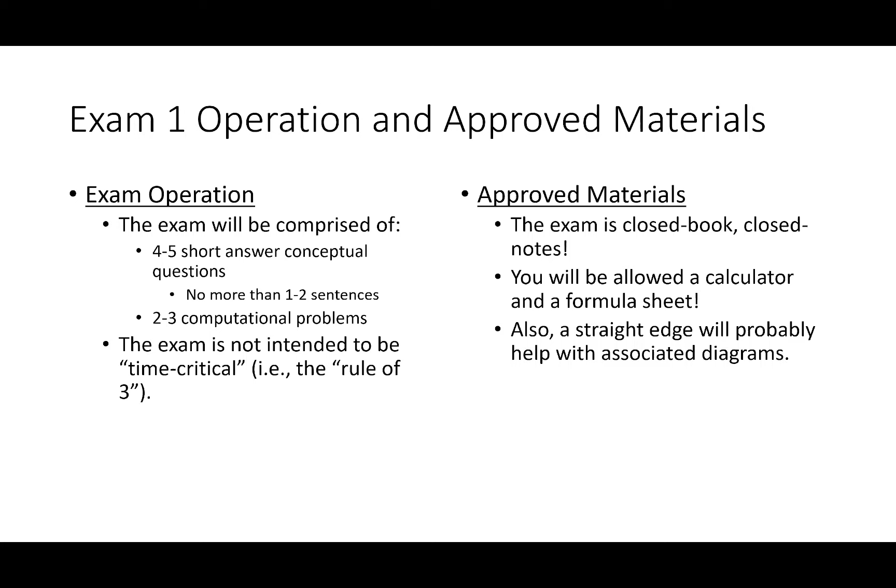It's closed book, closed notes, but I am going to allow you to bring a formula sheet. I'll say that a straight edge might not hurt. It will definitely help during exam 2 and 3. It may not be a bad idea to go ahead and bring a ruler, a scale, something like that, but it's not absolutely necessary. On exam 2 and 3, though, it will help.

In terms of the formula sheet, the one big thing I really want to caution against is putting fully worked out example problems. That is not me trying to be difficult. It's really more for your benefit. I have had a number of instances in the past where there'll be like a truss analysis on the exam, and then suddenly numbers from the formula sheet find their way onto the joint analysis that you're doing on the exam, and now the joint analysis doesn't make any sense. So what I would say is steer away from doing fully worked out example problems. I don't have a problem with snippets or things like that. But I would just steer away from that.

The big thing, though, that's really most important to me is that the formula sheet needs to be prepared by you, okay? What I don't want to see is just, here's the slides, let's copy and paste them, scale them down to an 8.5 by 11 double-sided and hit print. Yeah, you could do that in about 5 minutes, but I'm a believer that making the formula sheet is studying. And so going through the exercise of crafting it yourself and taking your thoughts and organizing them into a formula sheet, I think is valuable. And I'll tell you this, the formula sheets in this class do tend to be pretty thin in content because, I mean, how many formulas have we discussed this entire semester? Like 6? You know what I mean?

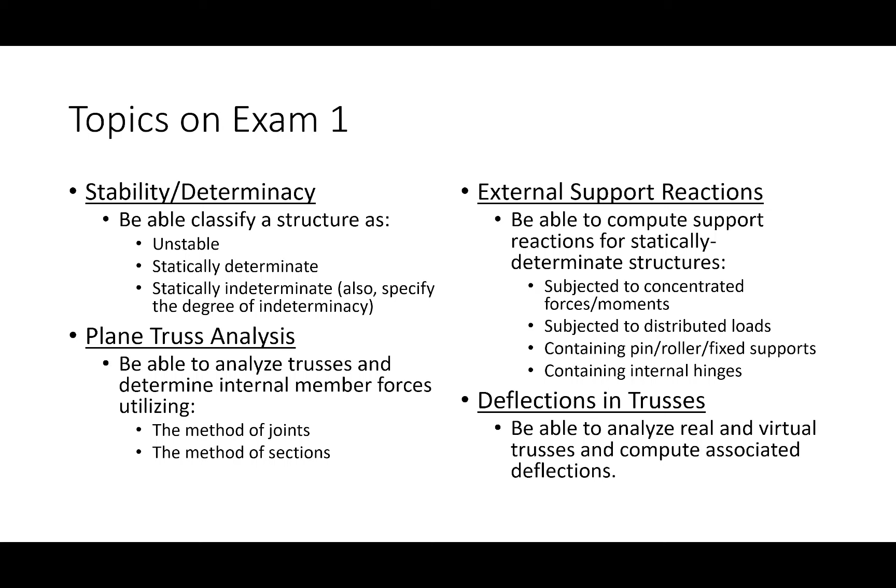The rest of this slideshow is meant to be the greatest hits over the past 12 lectures for the purposes of assisting you in crafting a formula sheet. So for example, the degree of external indeterminacy. So I sub E. Remember, these I formulas are just comparing the number of unknowns in a system to the number of knowns. In the case of the external stability, the unknowns are the reactions. The knowns are the number of equations of condition plus 3.

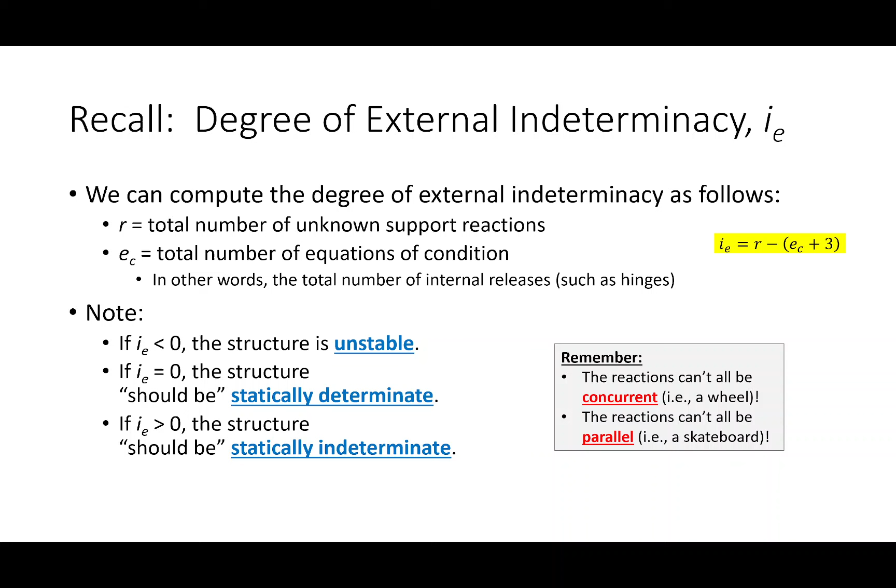Why plus 3? Because we have 3 equations of equilibrium, and the equations of condition are things like for every internal hinge or whatnot that's in the system. Remember, if I is negative, the structure is unstable. If I is non-negative, the structure should be stable. Okay? And remember what does the whole should be mean? Well, the reactions cannot all be concurrent and they cannot all be parallel. Okay? So if that's the case, it doesn't matter what I is, the structure is unstable. Okay? Make sense?

Then we have the internal indeterminacy of trusses. We have M plus R minus 2J. M plus R are our unknowns. We have the unknown reactions, and then one unknown for every member, because every member only contains one unknown force, it's either compression or tension, but it's only one value. For every joint, however, there are 2 known equations of equilibrium. Okay, so M plus R minus 2J.

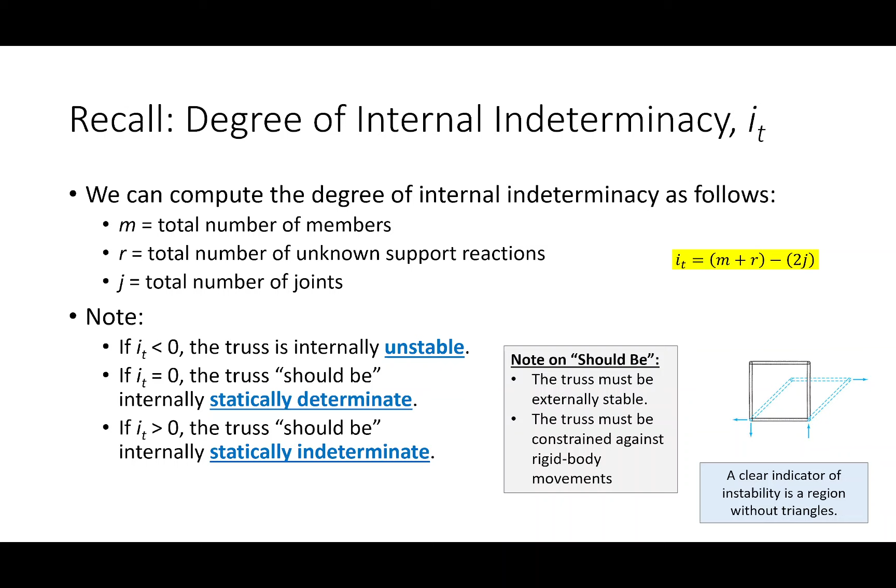And the same thing, these non-negative values of I don't guarantee internal stability. Internal stability for trusses happens when the truss is externally stable and when it's constrained against rigid body movements. And I'll go ahead and tell you right now, I am not going to try and trick you on this. Okay, I'm not trying to do that on the exam, so don't worry about that. In other words, if a truss is unstable, you're going to know. Okay.

All right, support conditions. We have 3 support conditions that we've been dealing with this semester: pin supports, roller supports, fixed supports. Keep in mind the rollers can be inclined. When we're dealing with distributed loads, these are the only 2 that we've dealt with, and I'm not going to throw some parabolic load or sinusoidal load. I'm not doing that, so don't worry about that. It'll be one of these.

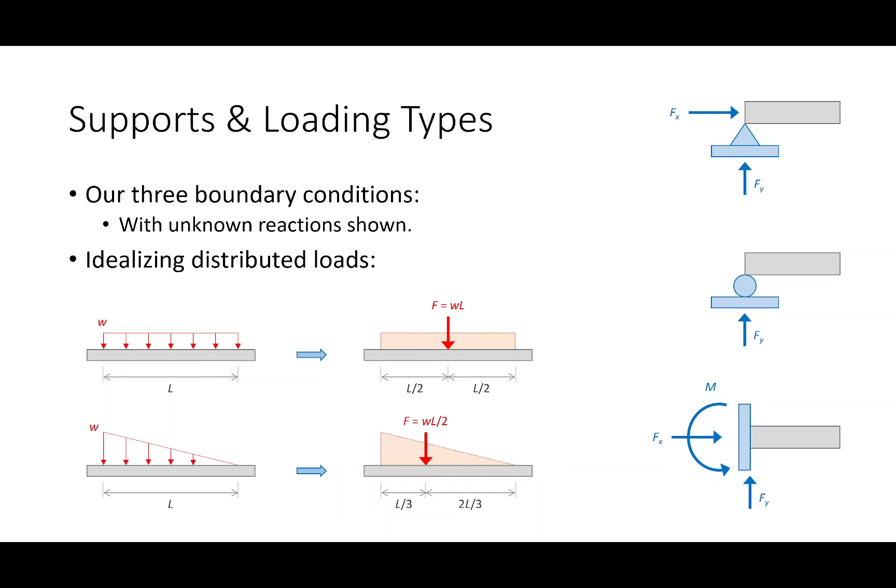Remember, we can collapse a uniformly distributed load into a point load at the middle, and a triangular load, we collapse that into a point load a third away from the largest magnitude. Don't forget that when you collapse a triangular load, the magnitude is WL over 2 because it's a triangle. Okay, so don't forget the 1/2. That 1/2 is very easy to forget. I've had a lot of students forget to throw the 1/2 on there, so don't forget that.

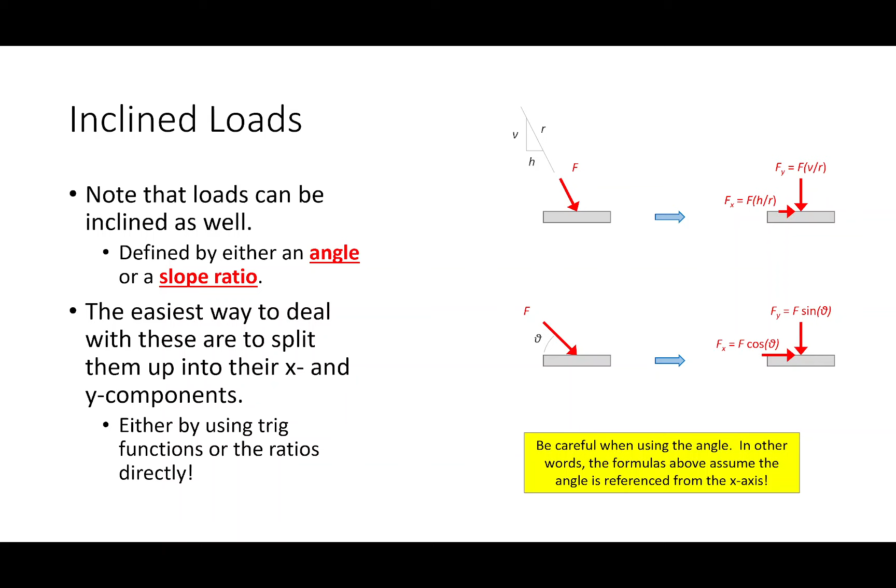Incline loads. Don't forget that an incline load is split up into its X and Y components. You can do that either with the slope ratio or with an angle. In most civil engineering applications, I have found that inclinations tend to be expressed with slope ratios. Like roofs are on a 4/12 pitch or what have you. So slope ratios tend to be how they are expressed. And by the way, this presentation is on Blackboard, so if there's anything you missed, it's there.

For inclined rollers, we can do the same thing. Just remember the slope ratio flips because we're dealing with a perpendicular line. The line of action of the reaction is perpendicular to the slope of the ground. So for example, if the ground is 12 over and 5 up, this is 5 over and 12 up for the reaction. So that's why the vertical component is 12 over 13, horizontal component is 5 over 13.

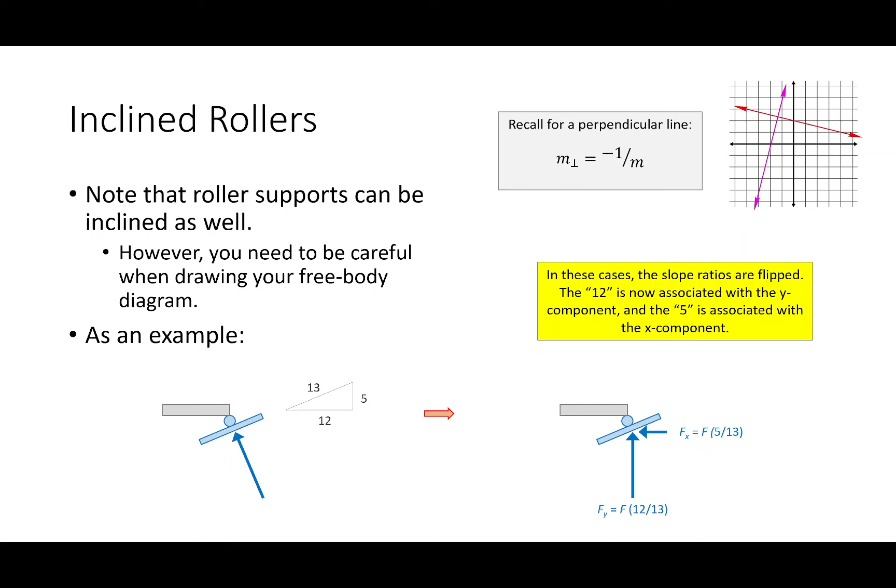Let's see. When you cut a section through an arbitrary point in a structure, you have at most 3 internal unknown forces, but when you cut a section through a hinge, you only have 2 unknown force components because the internal moments at a hinge are 0. So if you cut a section through a hinge and look at one side of the structure or the other, you can sum moments at that hinge looking at that left half or right half of the structure, looking at that free body diagram, and you can rest assured that the internal moments there are 0.

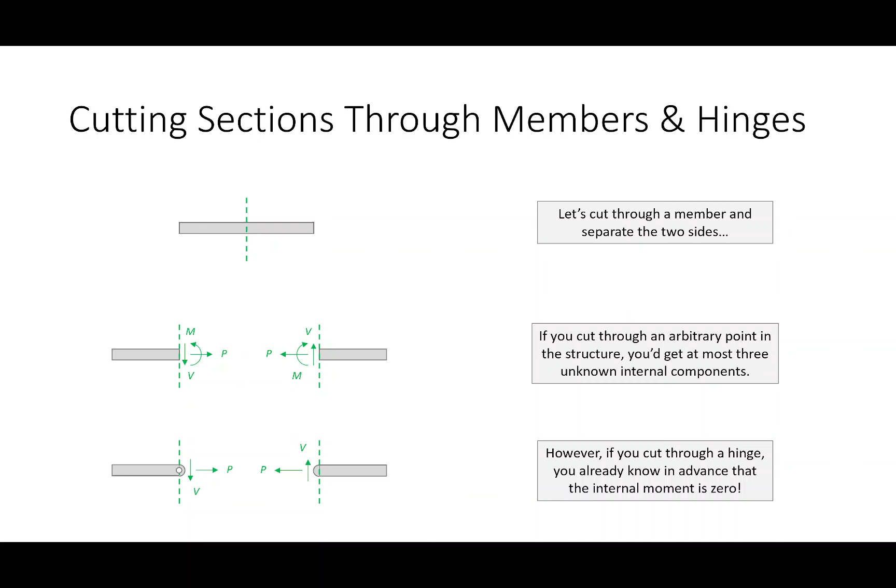And for trusses, we have 2 analysis methods. We have the method of joints or the method of sections. When we deal with the method of joints, keep in mind that we are dealing with a situation where all the forces meet at a common point. So we can only sum forces in the X direction and sum forces in the Y direction when analyzing a joint. We don't have moments at a joint because there's no non-concurrent forces. So with that, we can only solve a joint with at most 2 unknown forces.

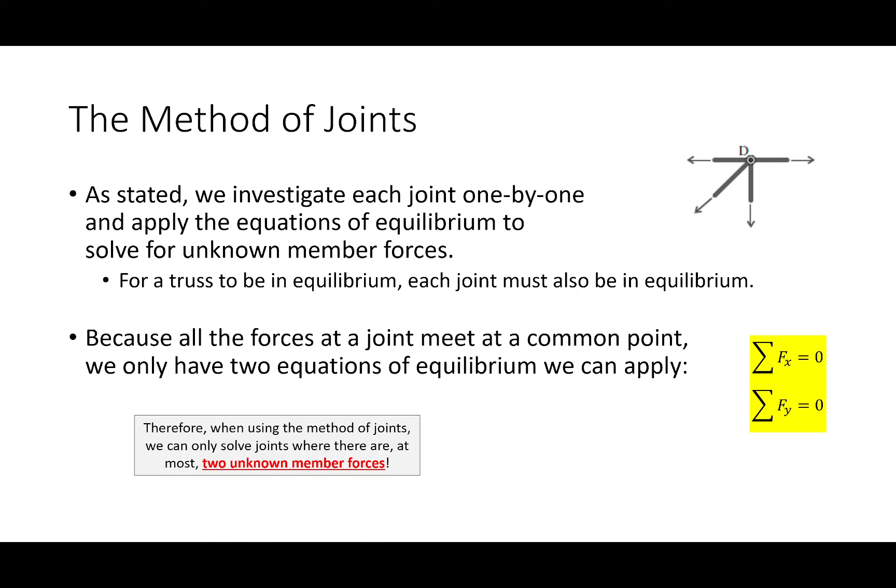So whenever you're doing a joint analysis, keep in mind that you can only deal with 2 unknowns at the same time. Probably not a bad idea on a truss problem, if you have to solve the entire truss, to chart out which joints you need to solve in which order to make your life a little easier.

Method of sections will give you that third equation of equilibrium, so you can cut a section through 3 unknown member forces or unknown members. But you have to do a little bit more drawing. The value of the method of sections, though, is that if you're only interested in the force in one member in a truss and it's in the middle of having to solve 8 or 9 joints, you can solve the problem pretty quickly utilizing the method of sections.

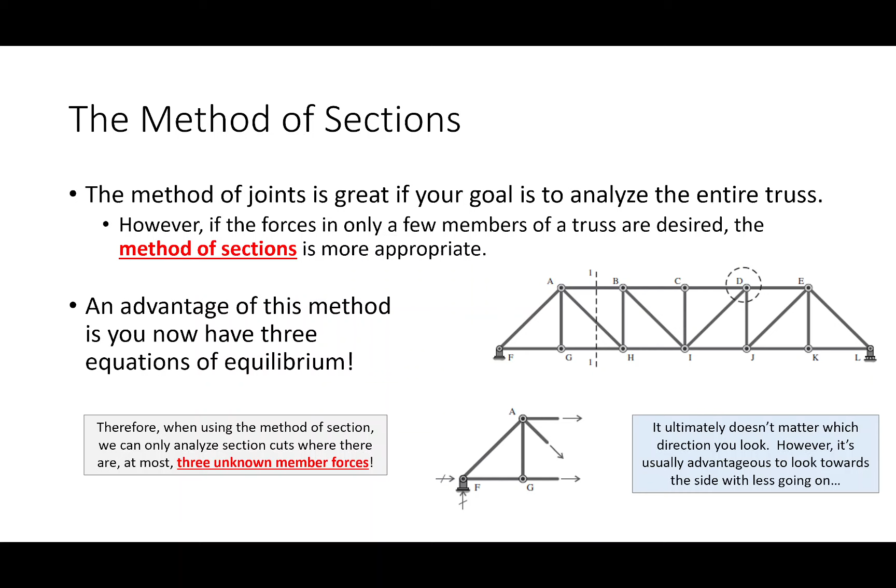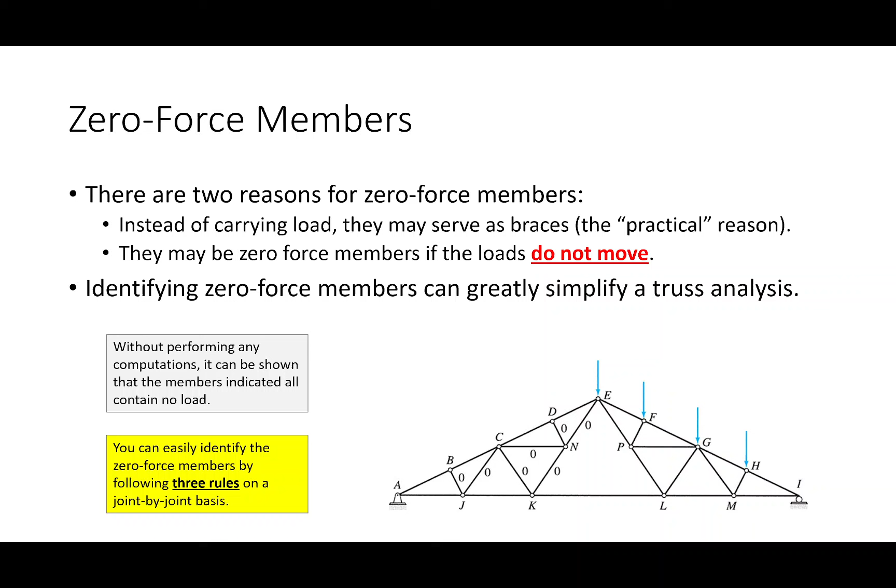0 force members. It's not a bad strategy to be able to identify 0 force members. Remember the 3 rules that we used were: 1, if you have 2 members framing through a joint, it's got to be 2 members, and there's no external loads applied to the joint, then both of those 2 members are 0.

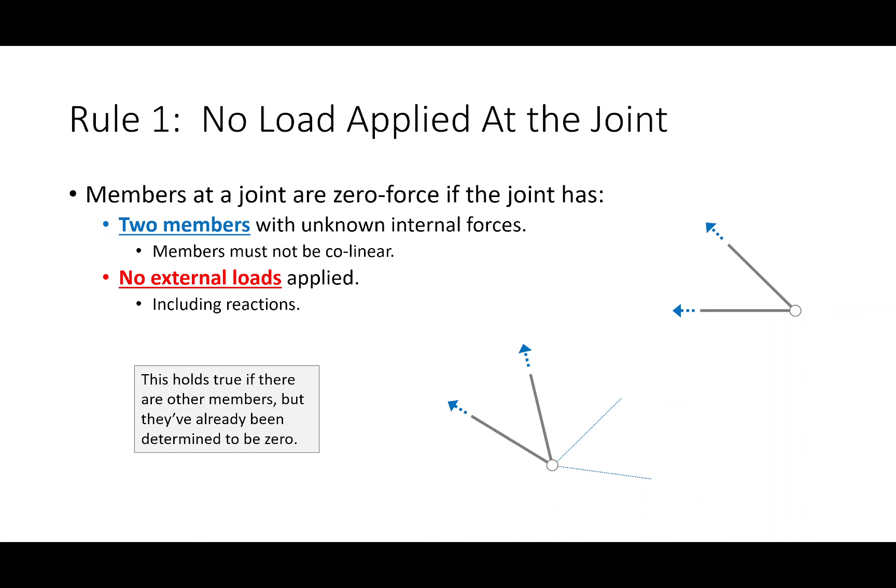Now that does also work in cases like this where you've got 4 members framing in, but only if you've already determined that 2 of those are 0. There's got to be 2 true unknowns, and there has to be no external loads applied to the joint. If that's the case, both of those are 0. If you have a case where you have 2 members and you do have a load, but the load is collinear with one of the members, then the other member is a 0 force member.

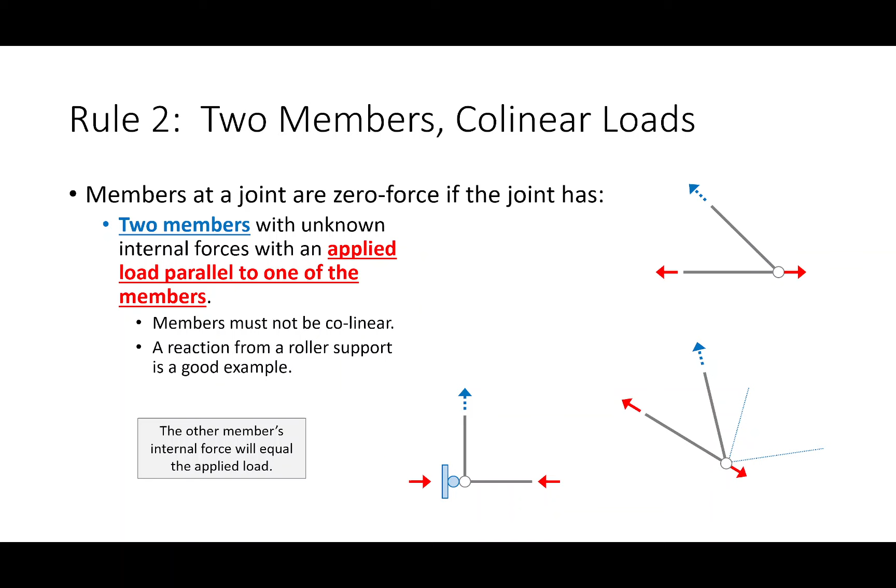Same thing applies if you have multiple other members framing in, but these are already determined to be 0. And finally, if you got a joint with 3 members, no loads applied, and 2 of the members are collinear, these 2 carry the same amount of load, and that's a 0 force member, okay? And we did have an exercise where we went through and practiced these on a somewhat odd truss, but we were able to identify some 0 force members pretty easily.

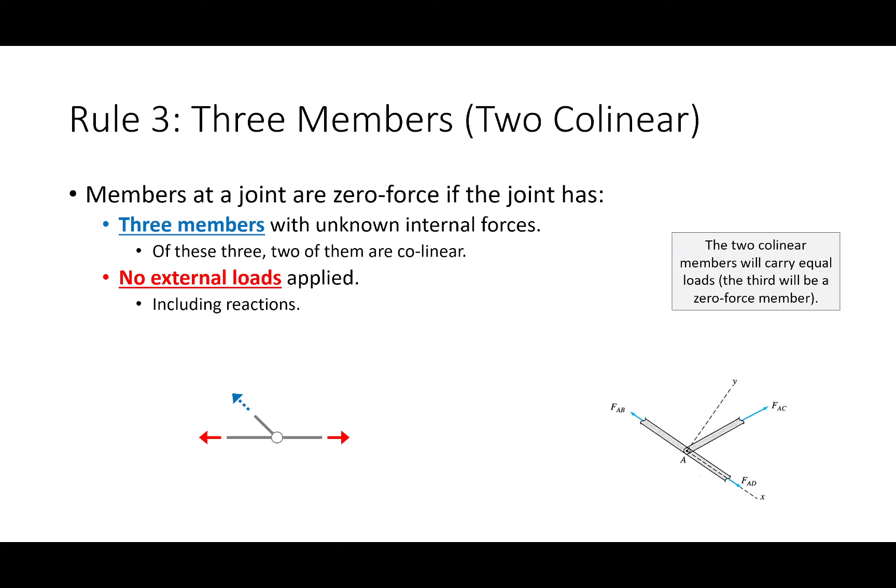And last but certainly not least, virtual work. So whenever we're assessing virtual work, we look at both the real structure and the virtual structure. The virtual structure is taking all the loads off and just placing a single unit load at the point of interest with a magnitude of 1 in the direction of the assumed displacement. So we solved the real truss, solved the virtual truss, plug and chug.

Very tabular expression. And if you need to do any tabular computations, I will provide a table for you because it takes a while to draw that out. This is not a table drawing test, okay? So I'm gonna save you time there, okay? Does that make sense?

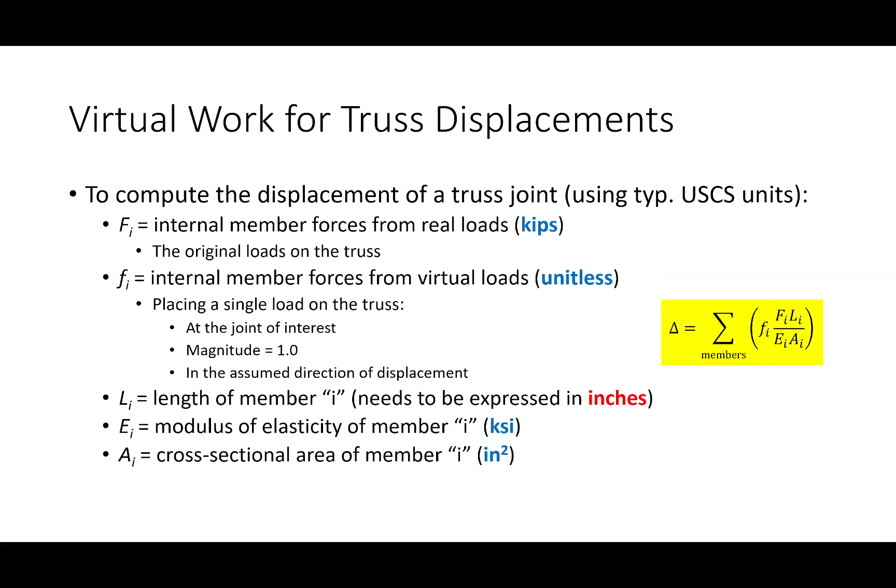Okay, that is the exam. You have the rest of class to ask me whatever is on your mind. And my goal is, if you are nervous about the exam on Monday, to make you not nervous about the exam on Monday. So anything that's on your mind, floor is yours.

Yeah. Will there be any definitions, or are they just like calculations? Will there be any definitions? Maybe, but if there are, they will be very minimal. I mean, this is a structural analysis test. Here, let me answer it this way. I gave a statics exam last week, and there were terminology-based questions on that exam, but out of a 100-point exam, each of those questions was maybe worth 4 points. So very, very minimal. The star of the show is the computations.

How many of you are nervous about the exam? And if so, why? I'm curious. Anybody nervous about the exam? Well, that's good. I'm happy about that.